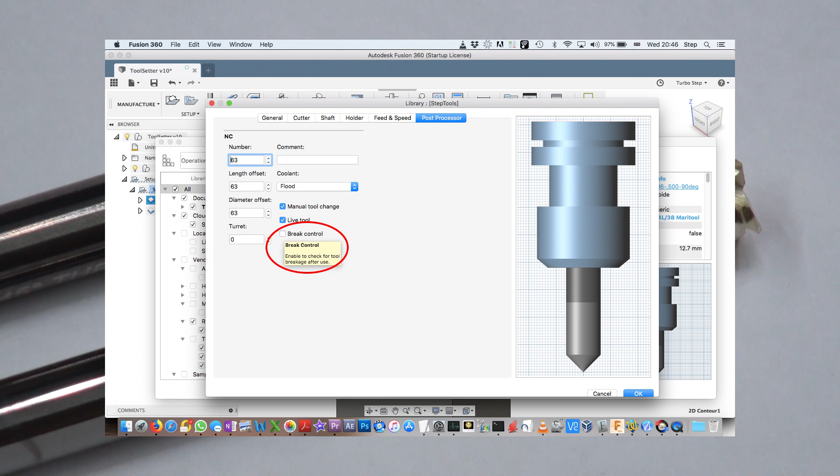A while ago I started a thread on the CNC Zone and uploaded a simple breakage detection routine, but it didn't seem to raise much interest. I've since improved the routine and figured a video would probably be less abstract.

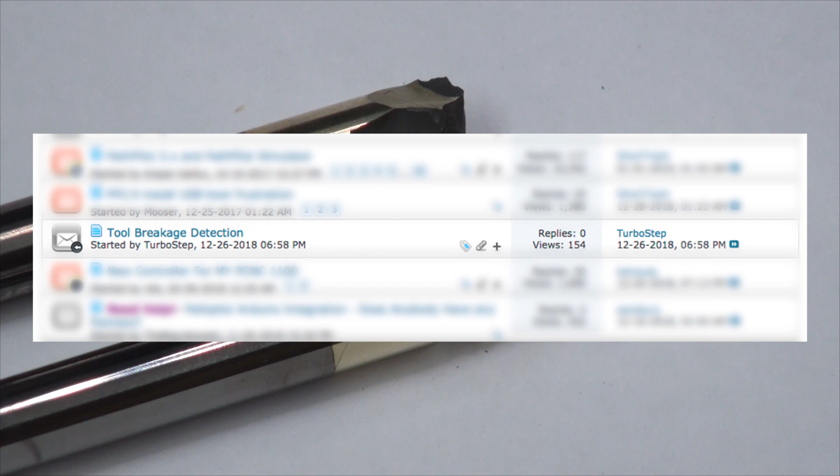First of all, two perhaps fairly obvious, but nevertheless important points. It probably goes without saying, but tools don't normally break at the end. I generally prefer to break my tools higher up. Detecting breakages like these doesn't need an accurate device. This opens the door to a wide variety of solutions.

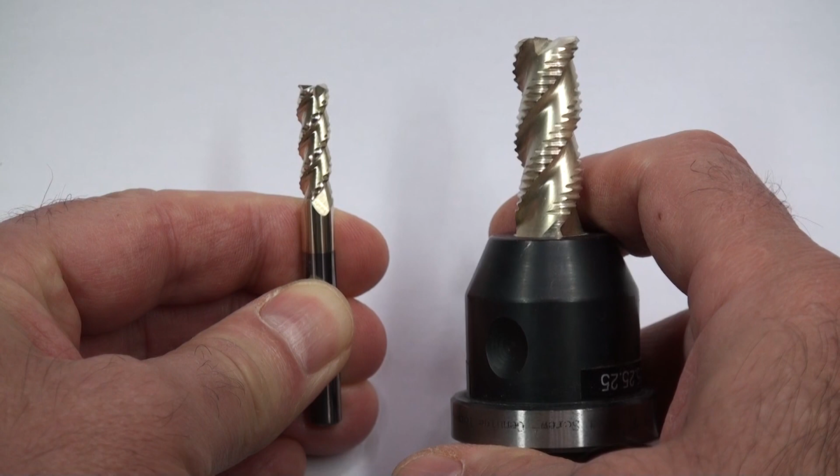The required accuracy of a tool setter is probably driven more by how much TTS pullout can be tolerated by the ATC before the forks crash into the tool holder body. The second point is that I've actually broken quite a few smaller tools, but not one of these. Tool breakage and pullout are therefore not the only issues you might encounter. I'll definitely be getting back to this point later on in the video.

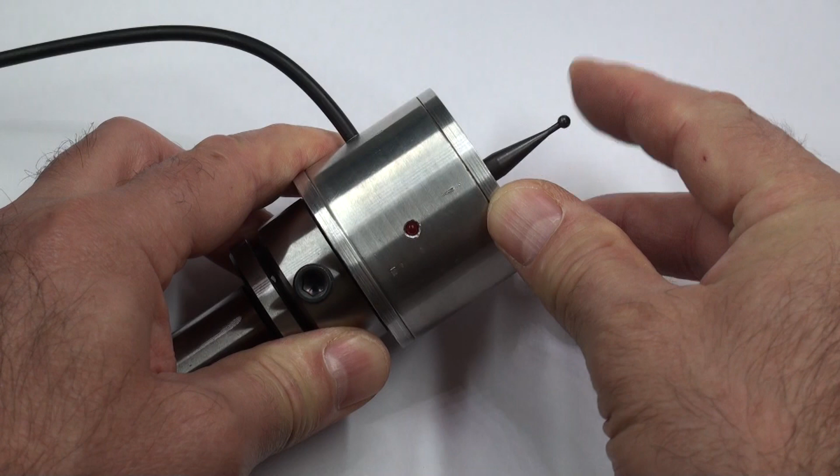In the CNC Zone thread I said I didn't own a tool setter. Well, I lied. This is a Wild Horse Econo probe I bought several years ago and never used. The probe tip can be easily removed and replaced by a tool setter plate, if you have full control over your fingers. I'm sure it's not the most accurate probe in the world, but as I'll mention later on, it might actually be the better tool setter.

The tool setter plate is made of aluminium, which is not the ideal material. It's going to get pretty chewed up after it's measured a few tools, but it's more than adequate to detect the tools I break. So let's see it in action. Here I've mounted the tool setter in a vise, but this is just for testing. I could have mounted it anywhere.

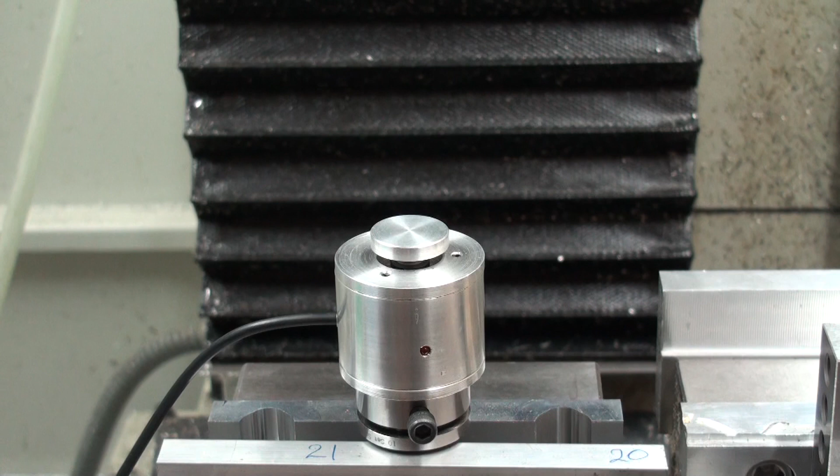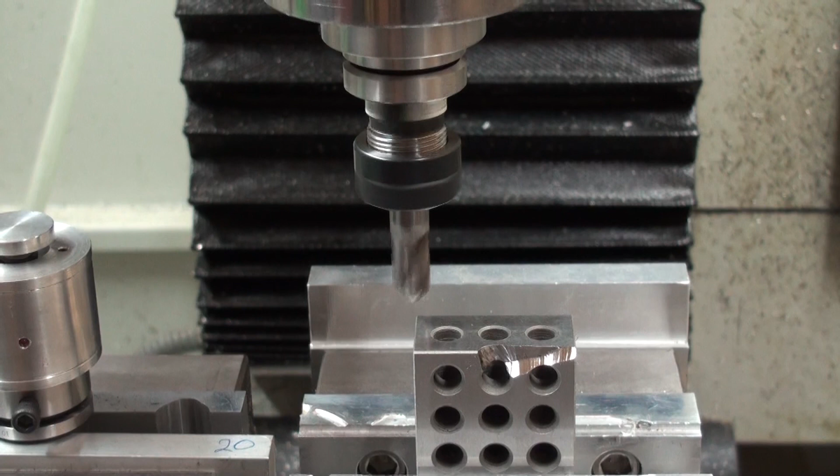I'm running a program from Fusion 360 to simulate the machining operation by just tracing around the top of a 123 block. Notice the gouge. I'll explain that a bit later on. After completing the first op, the tool breakage detection routine is called before changing to the next tool. The tool length checks out, so we can safely change the tool and continue with the next operation.

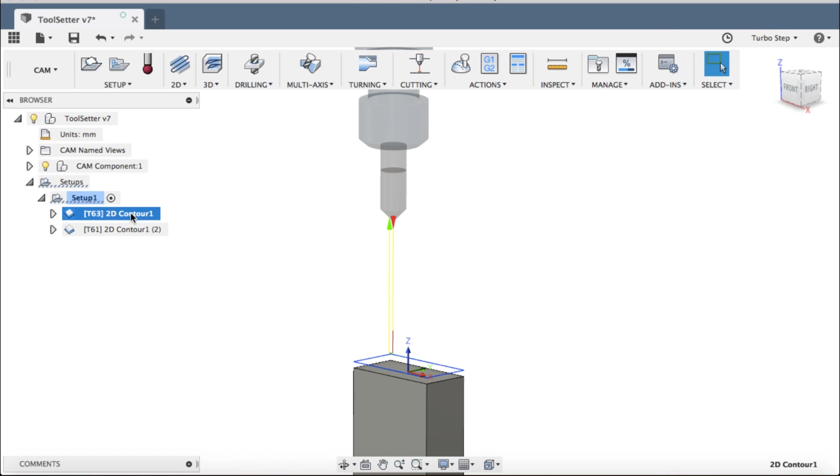There are several ways to implement tool breakage detection in Fusion 360. I'll explain three methods I've tried. The first is to associate the tool breakage control with the tool itself. This means the routine will be called each time you've finished using a tool. If you have several ops using the same tool, it's intelligent enough to wait until the end of the last op before checking the tool length.

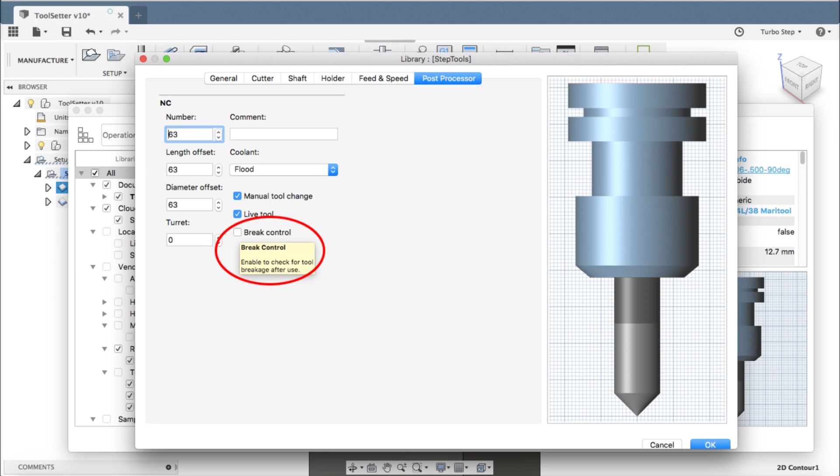I'm not too keen on this approach for two reasons. Firstly, there's no indication in the operations tree that a tool check has been added. And secondly, you might not always want a tool check to be performed for a particular tool. I prefer to explicitly insert a tool breakage control routine into the operations tree exactly where it's required. I'll show you two ways this can be done.

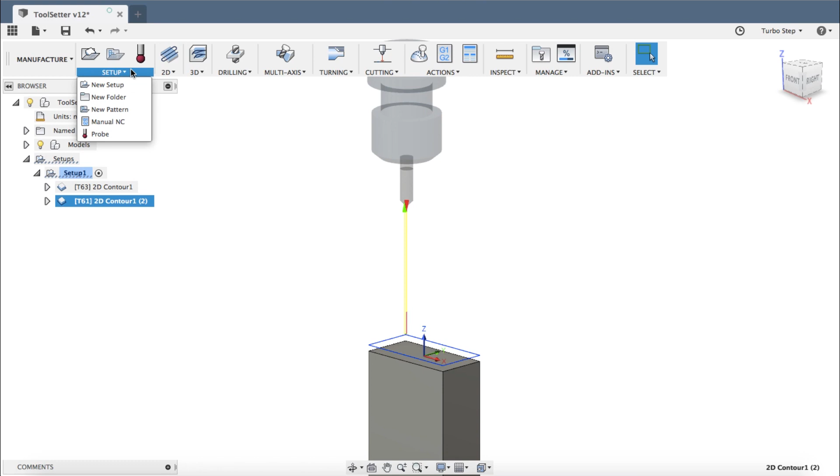The method I used for the video, and I assume the way Fusion expects it to be done, is to go to Setup, Manual NC, and select Tool Break Control. Just move this up to where you want the tool to be checked, and that's all you have to do. After completing the first operation, the tool break control routine will be executed, and if the tool length checks out, the program continues with the tool change.

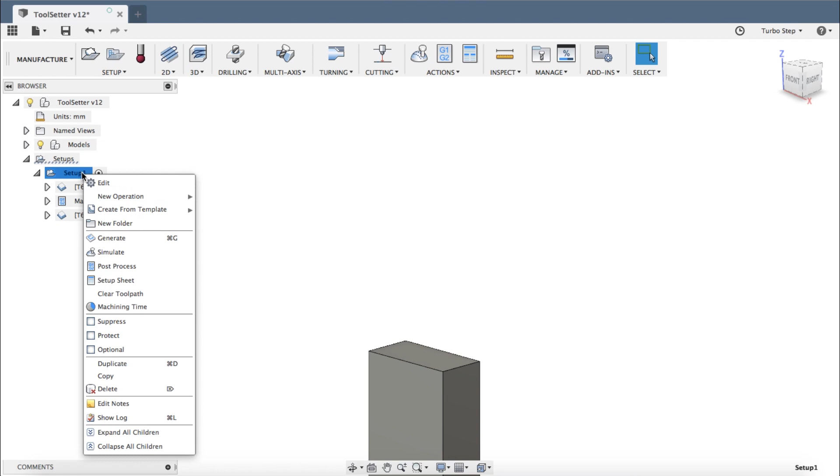I have to point out at this point that both of these methods require changes to the post-processor. So let's take a look at the post-processor settings and the generated code. The post-processor dialog has a fairly long list of properties, and I've added another 4 for the tool break control at the end.

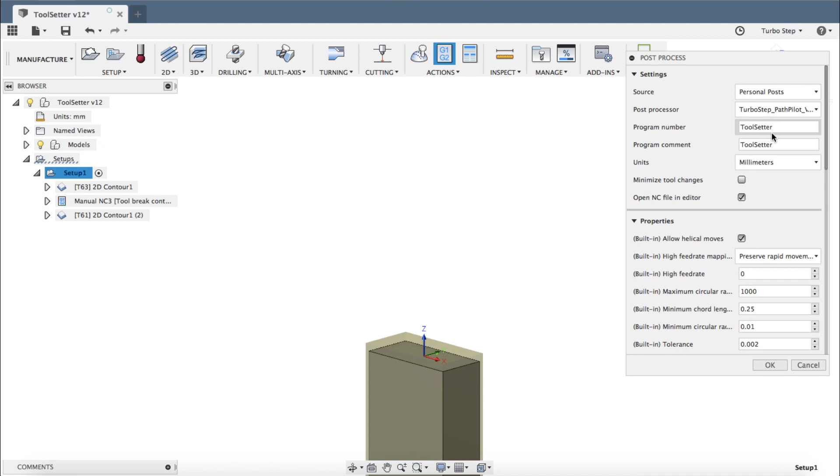Now if you're using a Mac on a laptop, you may need to scroll down to find all the properties, but the scroll bar may be missing. The trick here is to drag the dialog to the right until the green bar appears, and then release it. You should then be able to scroll to see the parameters down below.

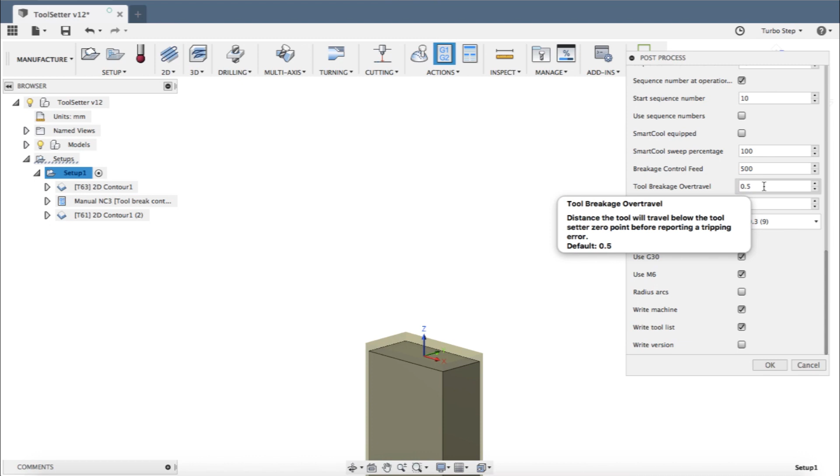The tool breakage tolerance, or perhaps I should have called it tool length tolerance, is used to check for both broken tools and tool pullout. Tool breakage over travel should be set larger than the tolerance and allows for a higher measurement inaccuracy when initially probing with a faster feed rate, and also controls the retract after the first probe.

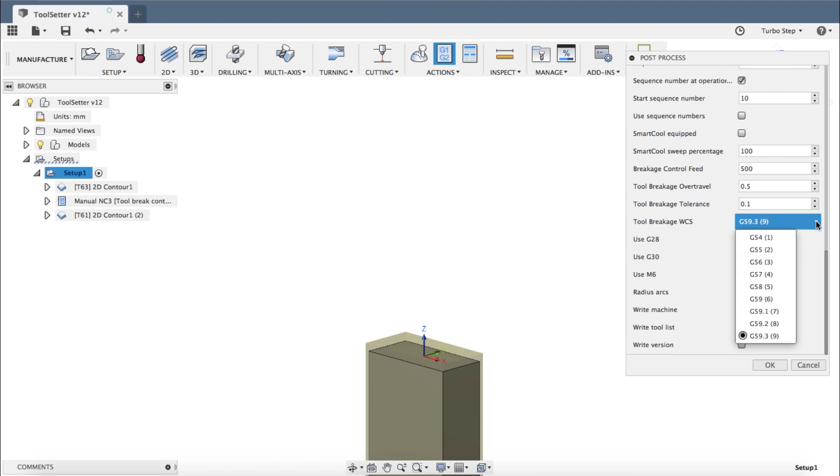An initial tool check is performed at this feed rate, and then the feed is reduced by a factor of 20 for a second, more accurate measurement. The work coordinate system is changed while checking the tool, and later returned to the original coordinate system. Here I chose to use G59.3. Now let's take a look at the generated code. Fusion inserts just a single line to call the tool break control routine and pass the parameters we've just seen.

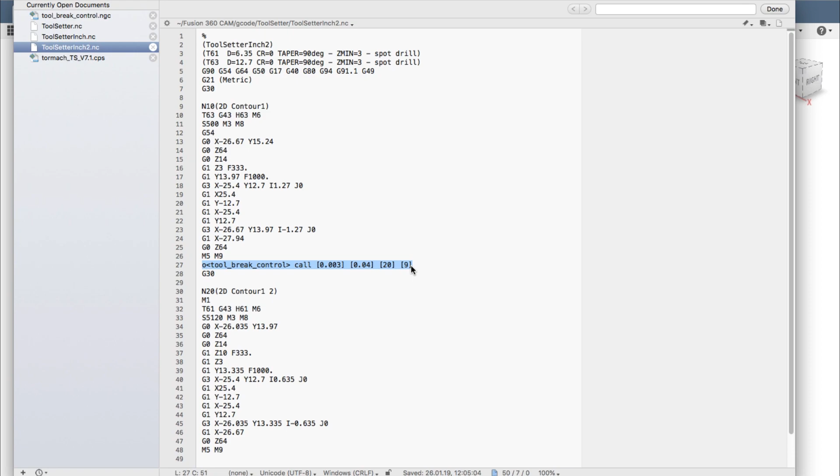A much easier way to arrive at exactly the same result without modifying the post-processor is to add a Fusion 360 pass-through. For this, you can simply copy the same line from the G-code examples I'll be providing with the subroutine. In this case, I'm taking the values from the inch example and pasting them into the dialog. Obviously, you can modify the parameters as you wish. Move the entry to the correct position in the tree, as before, and rename it. To reuse it more easily later, it can be saved as a template.

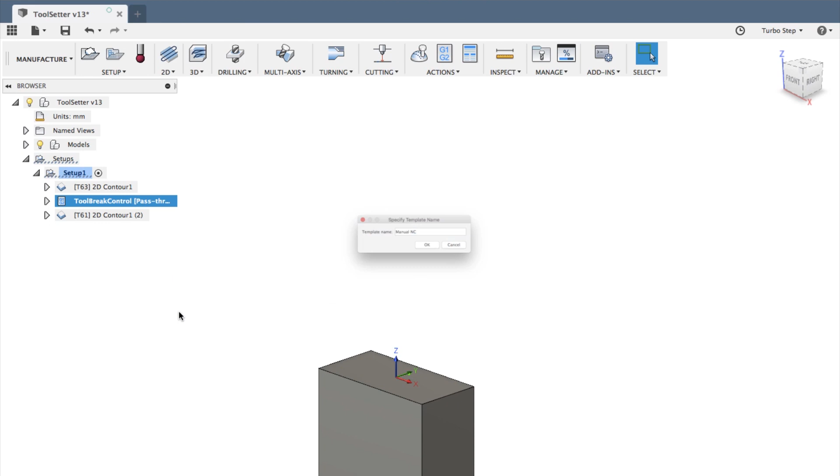The template can be reused by simply selecting it from the Setup Create from Template menu. This is the fastest way to add the routine once you've created the template, and creating the template is far quicker than creating a copy of the post and modifying it.

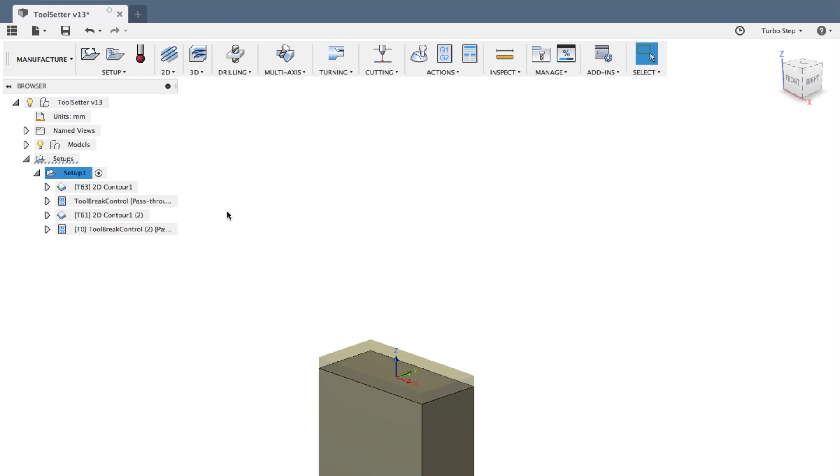Be aware that Fusion doesn't generate any errors if a tool break control is inserted into the program but the chosen post doesn't support it. I said before the pass-through generates exactly the same code, is easy to implement, and there's no danger of the code being affected by new post versions.

Here I've placed a shim stock on the tool setter to simulate tool pullout. You've already seen this part, so I'll fast forward. The tool stops at the clearance height set in Fusion and rapids from there to the tool setter position. The routine will stop here to avoid a crash if it detects the clearance above the tool setter trigger point is less than half an inch. It's the user's responsibility to ensure that the clearance height clears all other parts and fixturing.

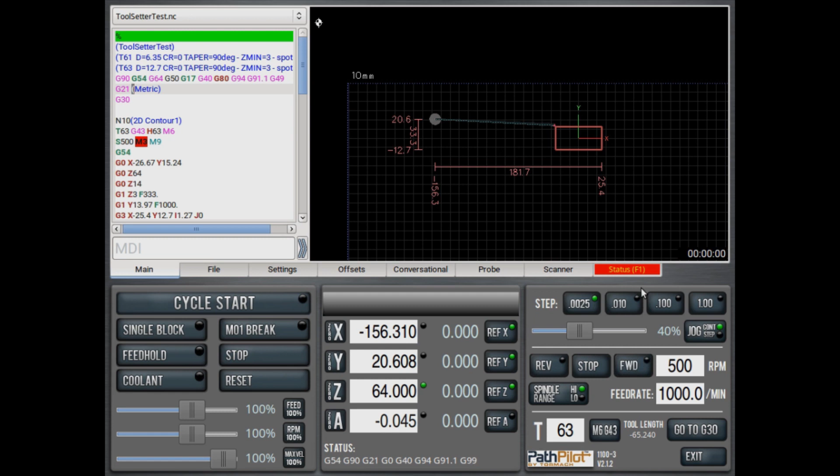This brings up a very important point. The tool setter trigger point must be set to Z0 in the probing work coordinate system. Later in the video I'll explain how to set this up. In this case, the routine has checked the length and stopped the program showing a warning of possible tool pullout.

So now let's get to the gouge. I'd run the program at least 10 times when for some reason it started with a higher spindle speed. I was still trying to work out what was going on when the tool hit the block. Really stupid, but it was quite interesting nevertheless. It turns out that instead of restarting the program, I just hit cycle start and PathPilot ran the second op. PathPilot was expecting a shorter tool.

I've rotated the block so you can see the result. From this perspective, the tool runs from the right to the left and appears to get lower as the gouge progresses. This is not actually tool pullout. The block moved in the vise because I hadn't clamped it very well. I wasn't expecting to machine it at all. There was a cool shower of sparks, but I'm afraid I wasn't recording at the time. I'm not sure what the ideal colour of 1-2-3 block chips should be, but these had a very attractive turquoise blue colour. Doesn't really come across in the video.

I checked the tool pullout. There was none at all. The tool didn't break either. As you've seen, the workpiece moved and the machine lost steps, neither of which would have been detected by the breakage detection routine. Remember earlier on I said I'd broken numerous small tools, but never anything like a half-inch carbide end mill. Well, I'm not even sure the steppers of my 1100 can create the necessary force to break a half-inch end mill. If not, then lost steps are inevitable.

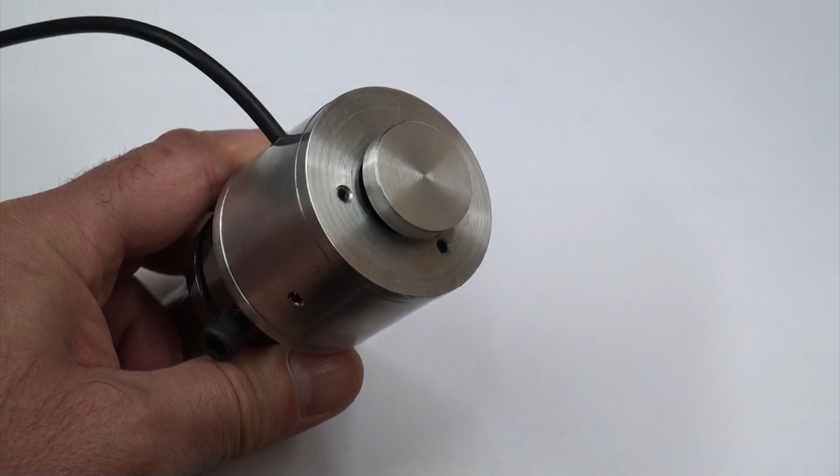A tool setter that can only measure in the vertical direction won't be able to detect all possible issues. This may or may not be a problem depending on which tools you use, like a shear hog for example, and how hard you push them, which brings me back to the better tool setter. Although mine is probably not accurate enough for me to use it for actually setting tool lengths, it can certainly detect a broken tool and a degree of pullout. It's not however limited to just probing the Z-axis. It could potentially be used to check for lost steps in the X and Y directions, similar to the Renishaw tool setter. I'm not really too keen on trying it out though. I'm happy to leave this to someone else.

The tool setter trigger point must be set to Z0 in the work coordinate system used for probing, in my case G59.3. Although the height of the tool setter is irrelevant in this case, I would suggest setting it to 0 or a value very close to 0, as explained by the video from Entirely Crimson.

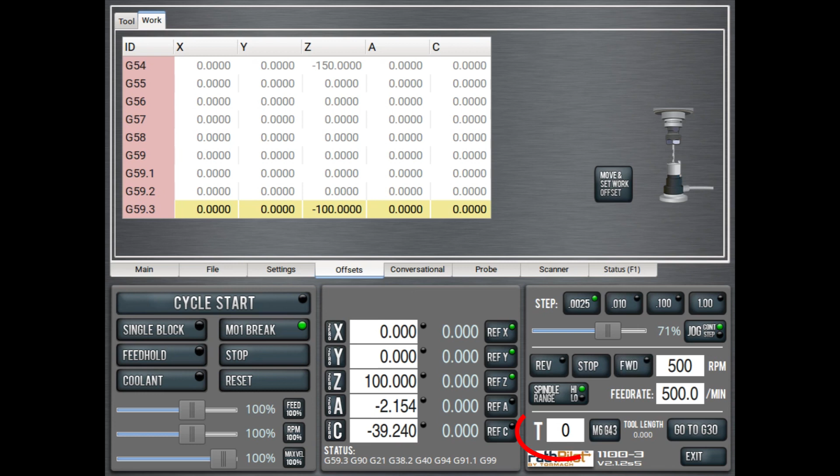With the ETS height set to or close to 0, you can then use the standard PathPilot routine to set the work offset rather than carefully jogging the head down. With no tool in the spindle and the collet retracted, set the current tool to T0, move the tool setter under the spindle nose, double check the work coordinate offset and simply activate Move and Set Work Offset. Finally, insert the tool in the spindle and position it roughly over the center of the tool setter, and while still in the probing work coordinates, zero both the X and Y DROs.